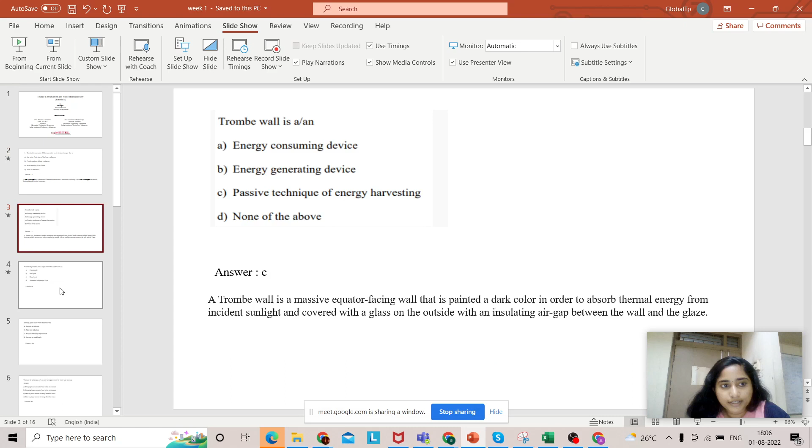So I'm just discussing these questions, whatever assignment is given - not all questions, few questions, and some few problems on that.

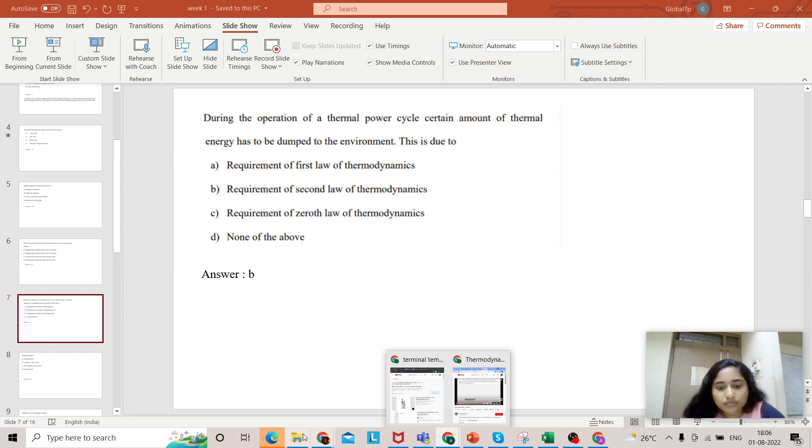So we have three participants till now, you can see only three participants here. This session is particularly to introduce you to the variety of questions - more or less the kind of questions you will be getting in your assignments and in the end exam also.

Second question: Trombe wall is an energy consuming device, energy generating device, passive technique of energy harvesting, or none of the above. Let me give an idea of what a Trombe wall is. A Trombe wall is a massive equator-facing wall painted a dark color in order to absorb thermal energy from the incident sunlight, and covered with glass on the outside with an insulating air gap between the wall and the glass.

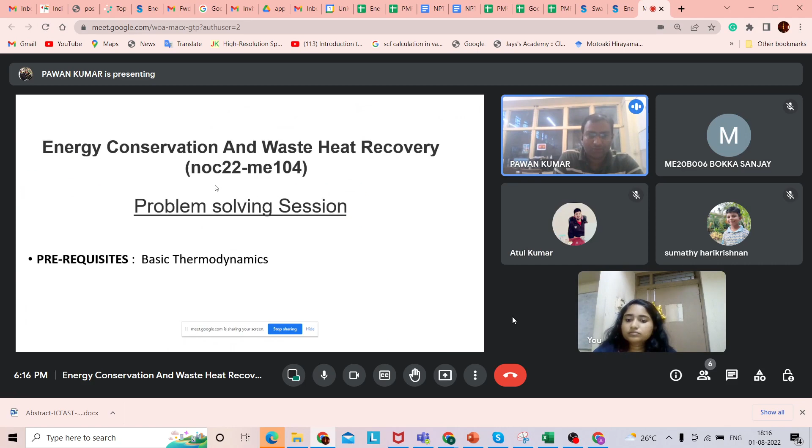So here we know this particular course and what its ID is. The prerequisites are basic thermodynamics. As Aiswarya has already gone through these things, I will not take that much time.

So this is one sample problem in which we have given 4 options, and the questions will be such that either only one option is correct, or maybe multiple options are correct. When only one option is correct, that question is an MCQ, multiple choice question. There is another category known as multiple selection question, MSQ.

As far as the marking criteria is concerned, for this particular example: which one is the correct statement regarding waste heat recovery? Option A states quantity of waste heat is not important for its recovery. Option B states quality of waste heat is very much important. Option C contains both quality and quantity of waste heat are important, and option D is none of the above.

With the basic understanding from this course or the videos you have gone through, on a weekly basis you will be given these assignments to have a comprehensive view of whatever you have learned through that particular week's video lectures. It's not that we will give you absurd things or things that are out of syllabus - nothing will be like that. More or less the things will be related to what is taught to you in that particular course segment or video lecture. So module by module we will proceed, and in that fashion we will give you assignments on a weekly basis. So this is one kind of question that is given here.

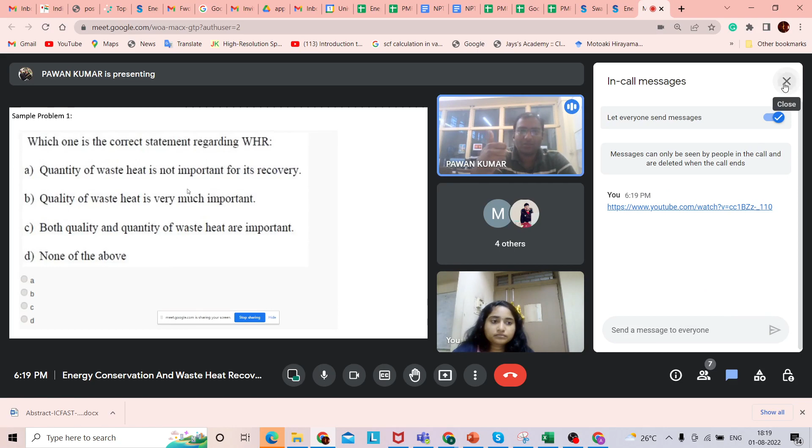So it's an MCQ question in which one option is correct. Once you choose the correct option and submit the answer, you will get mark 1. If you do not opt for it, or do not solve it, then you will not be getting anything.

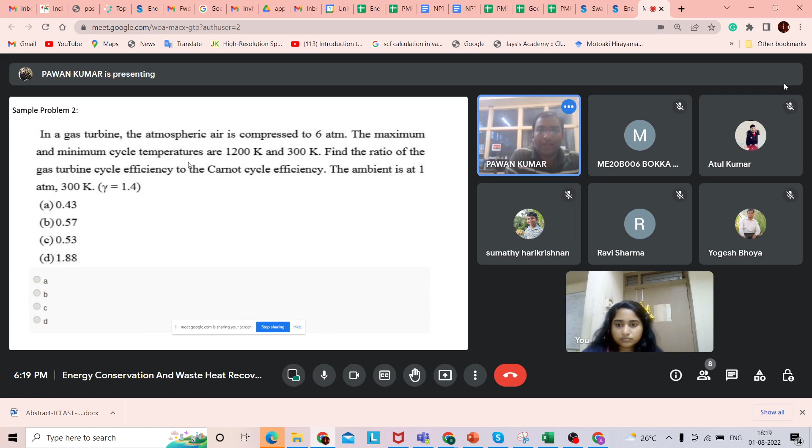Likewise, sample problem: in a gas turbine, it's a kind of numerical question. We expect participants to have the basic understanding, since the background will be taught to you. In this particular question, we are discussing the gas turbine. The atmospheric air is compressed to 6 atmosphere. The maximum and minimum cycle temperatures are given. Find the ratio of the gas turbine cycle efficiency to the Carnot cycle efficiency. The ambient is at 1 atm, 300 Kelvin, and gamma is given to you.

We have tried our level best to give you the necessary information in the question itself. You need not go for some other reference book or additional material, because our intention is not to check the level or the quickness of the way you are solving the question. It's about whether you have understood whatever has been taught in that particular week, and whether you are able to apply those particular formulas or concepts in solving the questions and arriving at the right answer.

Here you need to have two basic pieces of information in mind. As Aiswarya rightly pointed out, she gave the example of the Carnot cycle, Otto cycle, diesel cycle. Likewise, the gas turbine follows the Brayton cycle. Using the basic concepts of the Brayton cycle, and the formulas for efficiency and Carnot cycle efficiency, you can solve this particular question and arrive at the right answer.

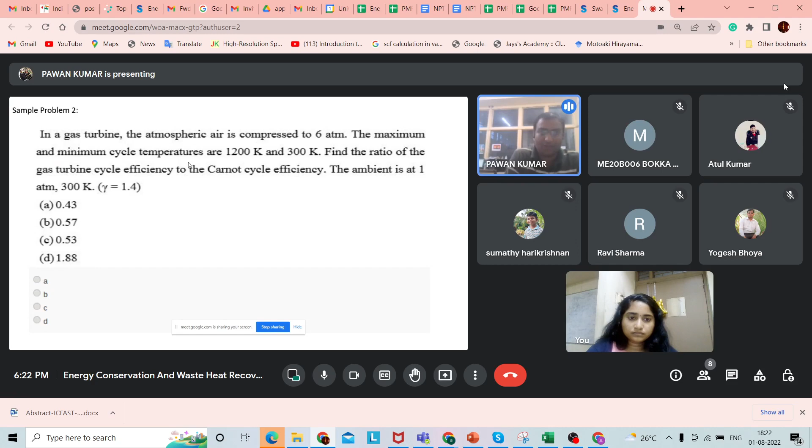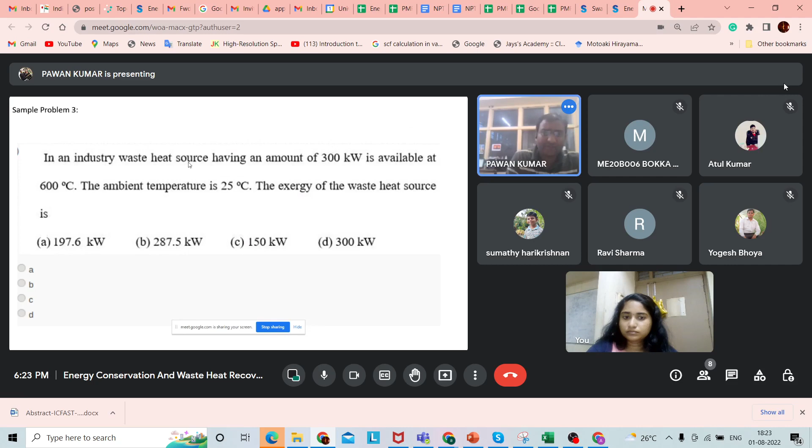Sample problem 3 is also related to basic thermodynamics. It mentions that in an industry, a waste heat source having an amount of 300 kilowatt is available at 600 degrees Celsius, and the ambient temperature is 25 degrees Celsius. The exergy of the waste heat source is asked, with 4 options given. If a student has thoroughly followed the videos and has the basic understanding, he can simply point out that this question is related to exergy, use that particular formula, and find the right answer. That kind of arrangement is there, so that you solve the question and get the right answer.

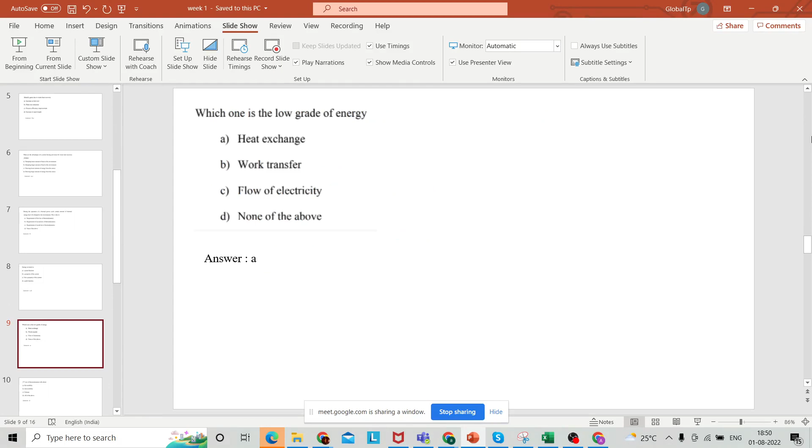Now next question, which one is the low grade of energy? Options are heat exchange, work transfer, flow of electricity, or none of the above. So what is low grade of energy? What is high grade of energy? First we have to discuss that, then only we can say the answer for this.

So there is a grade for energy, like the degree of convertibility of energy, such as stored work into applied work, which is often called availability. So energy having high availability, we can call that high grade energy. Low grade energy is when only a small fraction can be converted into applied work.

An example of high grade energy is energy stored in fossil fuels, where we can access about 90% of the energy. Sunlight is an example of low grade energy, where we get very low amounts of applied work from that source. So which one here is the low grade energy? Heat exchange is the low grade of energy.

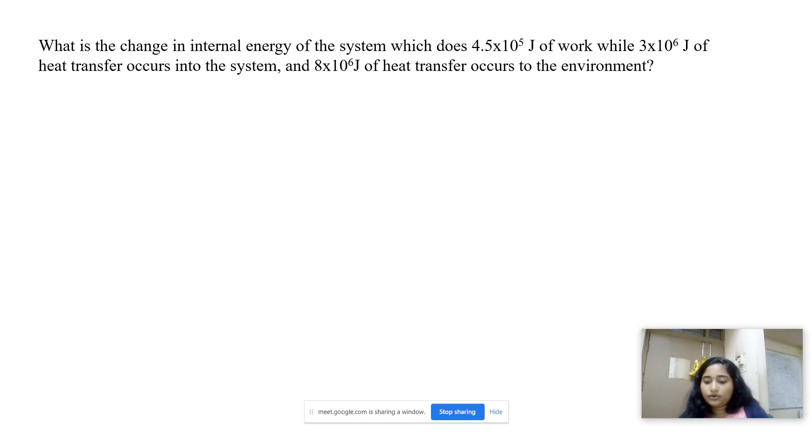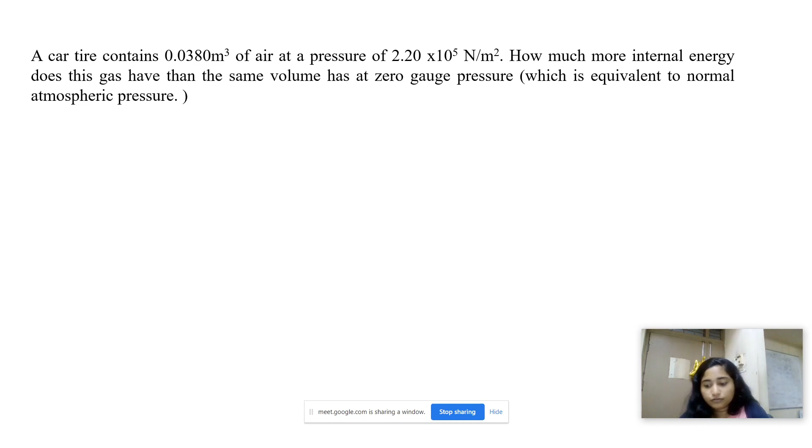So here the question asks the efficiency of the system as well as the work done, that's another kind. I will introduce the questions first, and we'll try to solve some of them, and you try to solve the remaining ones. If you have any doubt, interact in the NPTEL forum. We will discuss that in the next class.

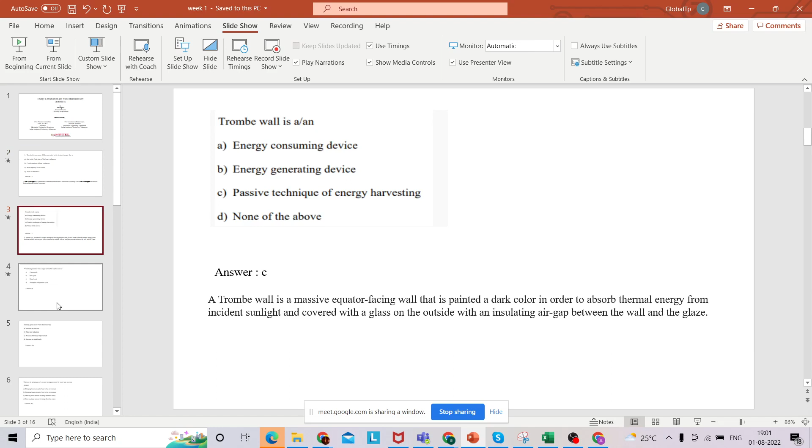I think you have solved assignment 0 and assignment 1 recently. Okay great. Yes sir, I actually just enrolled for the course just now. Okay, great, that's fine, no issues about this.

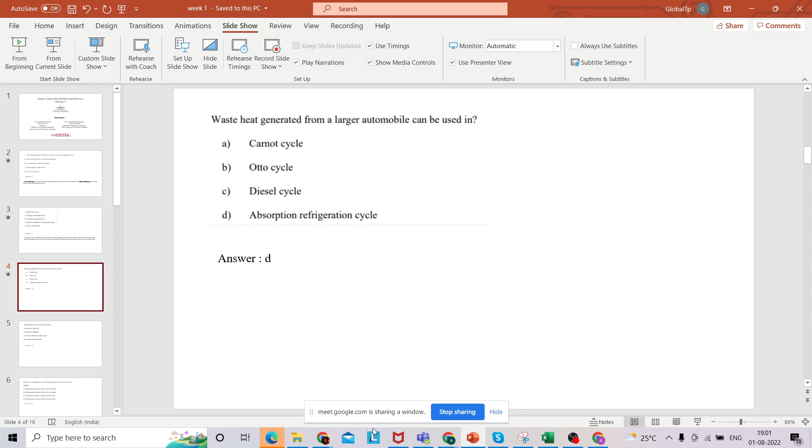You will be getting such kind of questions in your assignments. For example, this question concerns waste heat generated from a larger automobile that can be used. We expect the participant to have basic knowledge of thermodynamics, as well as the course content given to the audience. Otherwise people may say this was out of syllabus, not our concern. We have tried our level best to stick to the particular content provided by the course instructor professors in the video lectures, and accordingly we have tried to inculcate those things in our assignments and deliver them to you.

So more or less we have discussed these things, and we have mentioned that multiple choice questions will be there with only one correct option, and we will also be having multiple selection questions, MSQ. In those MSQ, if options A, B, C are correct and you have opted for only one, say option A, you will be partially awarded marks for that question. So such kind of things are there.

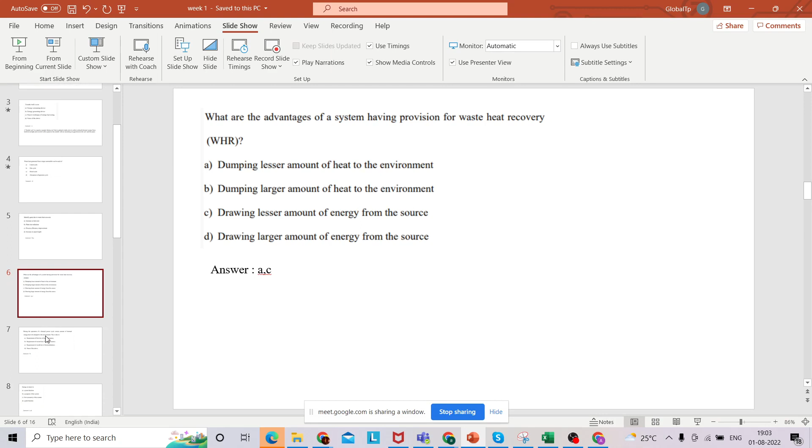Aishwarya, can you quickly go to the present slide you were showing earlier? See here, you have to know about what is heat recovery, and the advantage of waste heat recovery. These are the first lectures. And what are the operations with thermal power cycle?

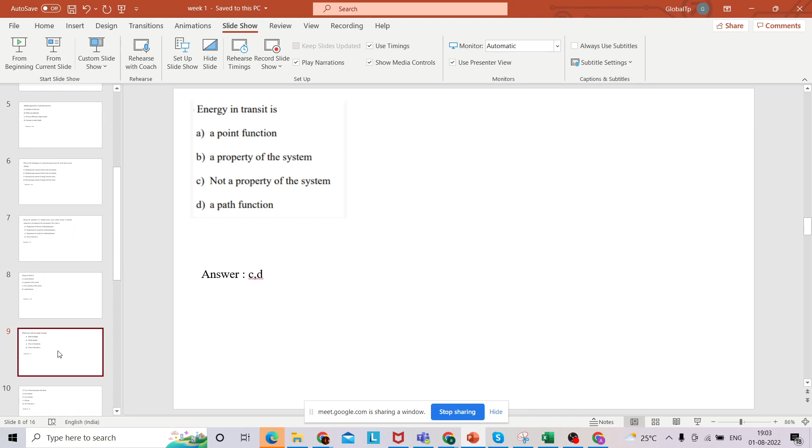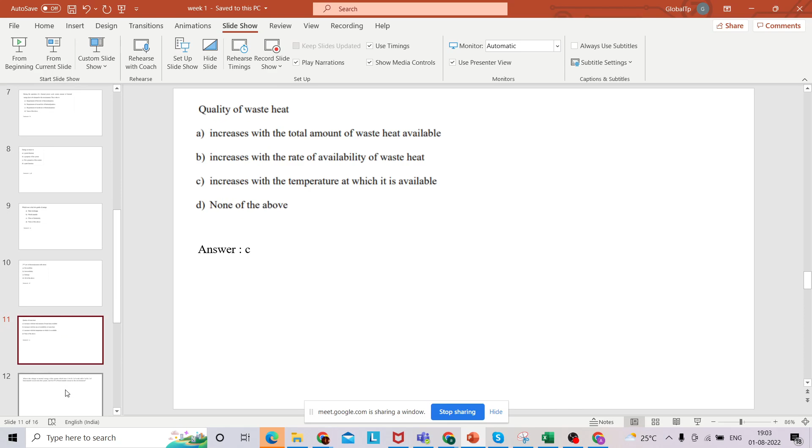Energy, thermodynamics, thermodynamic parameters and thermodynamic laws - second law, first law, zeroth law. That is the basics you should know for studying this course. And quality of waste heat and the numerical problems.

It depends on the problem, but mainly in the first 2 weeks of lectures it's only asking about heat, general energy, work, efficiency and entropy. So these kinds of problems you will see in the assignment questions - refrigerator questions, Carnot cycle questions, heat pump questions. These are the 3 questions you can see in the assignment. So you have to know the basics of thermodynamics, which constitutes all the thermodynamic laws, entropy, general energy.

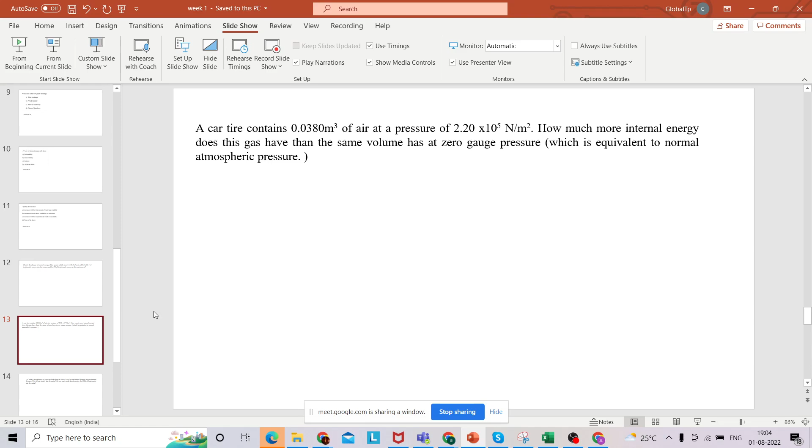Another thing I was pointing out is that you will be given help in the assignment itself, like the question regarding the units you have to enter. Suppose for a particular question you have to give a numerical value, and that has to be entered by you manually. So we expect the learner to go through the question properly, and you will find that the value has to be entered in that unit.

Please try to stick to that unit, because we will always mention the unit. If temperature is given in Kelvin in the question, you answer in Kelvin. If it is degree Celsius, you do it in degree Celsius. But in thermodynamics problems, you have to solve it in Kelvin and convert to other units. Problem solving should be done in Kelvin, otherwise you won't get the right answer - that's one important thing in thermodynamics they have to follow.

So more or less we have discussed these things, Mr. Sumit. Okay, sir. Yeah.

It's really a happy moment for us. We can expect a lot of enlightenment from the audience, because people in this course come from a variety of fields - we have learners from industries, learners who are faculty members of institutes, and some students also. So we can expect a lot of good questions and healthy discussion on the forum.